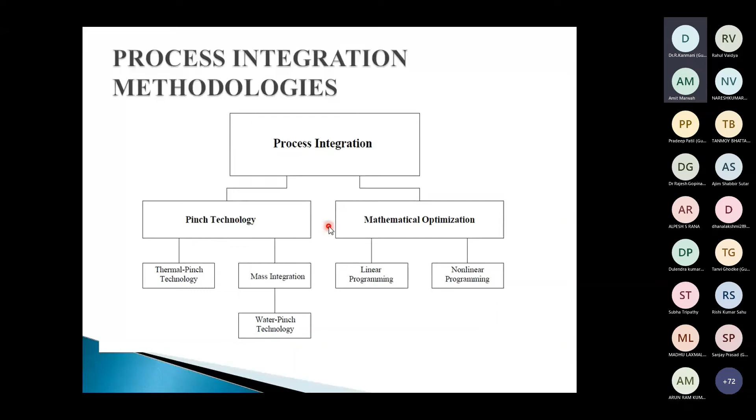I hope it is moving. Are we moving ahead with the slide? Yes, sir. Okay, yes, sir.

So there are two approaches. One approach is that you analyze the water network and try to reduce the cost of water. Reducing cost of water helps the industry in two ways: one, by paying less for the water, and two, by paying less for wastewater treatment, because if you use less, you generate less. So it's a double benefit if you can reduce water consumption. There are two approaches to this: graphical method and numerical method. The numerical method was suggested by Olesen and Polley, and the graphical design method I have taken from Robin Smith.

That is what I conveyed when discussing this. And this is the slide which I wanted you to look at, which is self-explanatory for pollution prevention. Have a look at it. I'll give some seconds to look at this slide.

So we can substitute toxic chemicals, we can reduce source consumption, we can initiate recycling, we can reuse, or we can reclaim from the waste. So there are various approaches to preventing pollution. Some of them are before the pipe, some of them are end of the pipe.

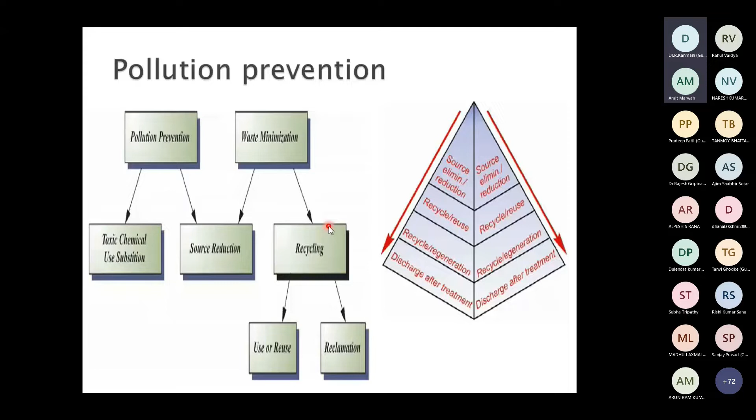This slide discusses something I mentioned before. You have a raw water treatment plant, so you take the raw water and treat it first, then send it to various processes. These are all process units which will consume water. In turn, the water gets polluted, and the outlet of all this combinedly goes to the wastewater plant to be treated.

Other portion of this water goes to the utility area, where you have a cooling tower and a boiler. So all this gets used, and becomes less polluted, but still not as raw as it was here. So you have another stream of wastewater. You mix these two, so you have less polluted water to treat. Ultimately the amount is more, but the pollution amount will be reduced because you are mixing a good source of waste and a worse source of waste.

There are other uses as well for the water. We use water in industry for many other things apart from process and utility. That use also generates wastewater. Combinedly, you send it to the wastewater treatment plant and treat it. As I told you, if you consume less here, you generate less here, so you are saving here plus here.

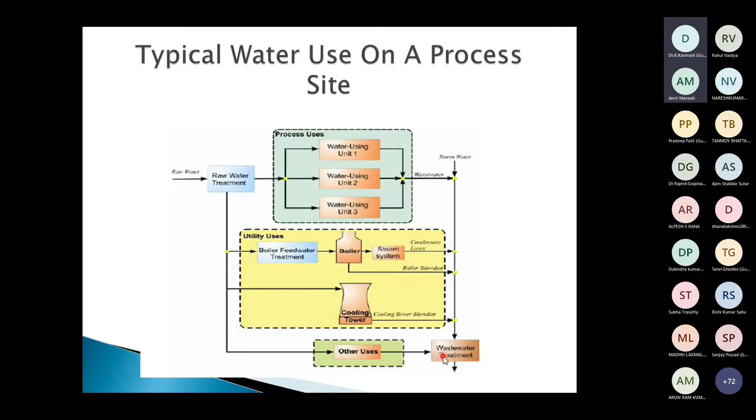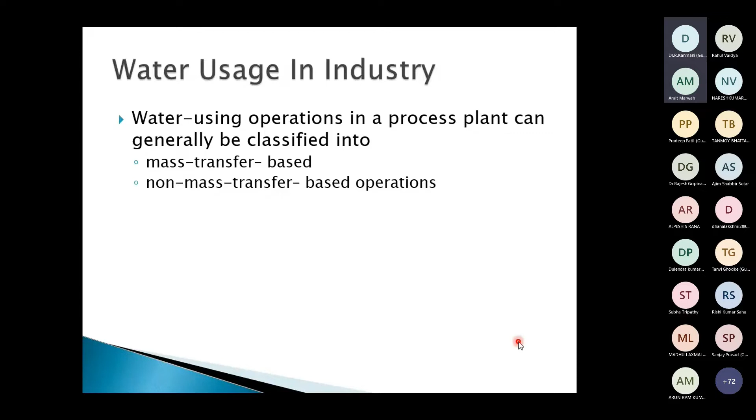We can classify our water using operations in industry into two basic main classifications: one which is mass transfer based, and other which is non-mass transfer based.

When you have a source which keeps adding some kind of pollutant to water, this happens. This line is nothing but the concentration of a particular contaminant in water. So this is your concentration in ppm, and this is the mass addition.

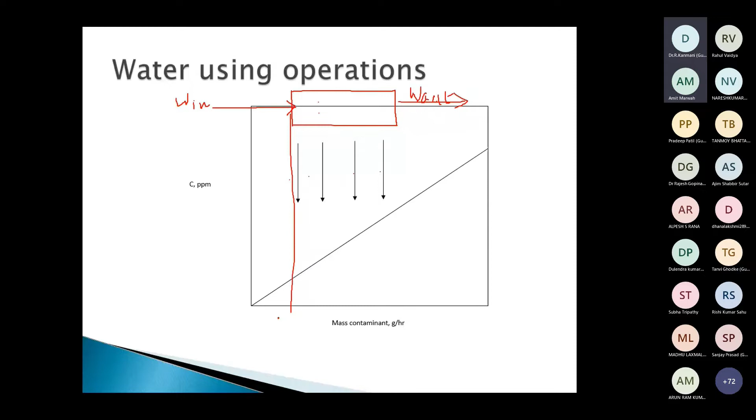So as water passes, say for example I have a process where water goes in and water comes out. During this process, some amount of contaminant is added. So this is the contamination addition to the water, and as it comes out, the concentration of contaminant is more. So naturally, this is in and this is out. Some mass is added, and because of that addition of mass in the water, the concentration level has gone from this to this.

So this is the concentration which has increased, this is delta C, and this is delta M or M. So mass added to the water makes the concentration gradient to the water. Correct?

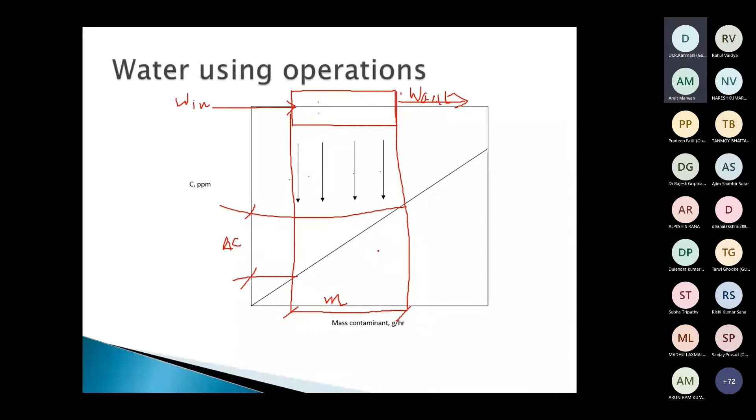So these are various water using operations in a process plant. On the left hand side of the screen, we have mass transfer based operations, and on the right hand side, we have non-mass transfer based operations. These are various operations which will absorb the contaminants from various sources, because of which water gets converted into wastewater.

So vessel washing, absorption, or reactor process. In reactor process, the water is coming out of the reactor. In vessel washing, the wastewater is generated due to washing of the vessel, while it washes the vessel it absorbs or receives contamination from the vessel. During the absorption process, if you are using water as a solvent, you are absorbing the pollutant from the gas, thereby generating wastewater. Likewise, there are various processes. I've just given a few representative examples here, however there are so many processes in industry which will add contaminants to the water.

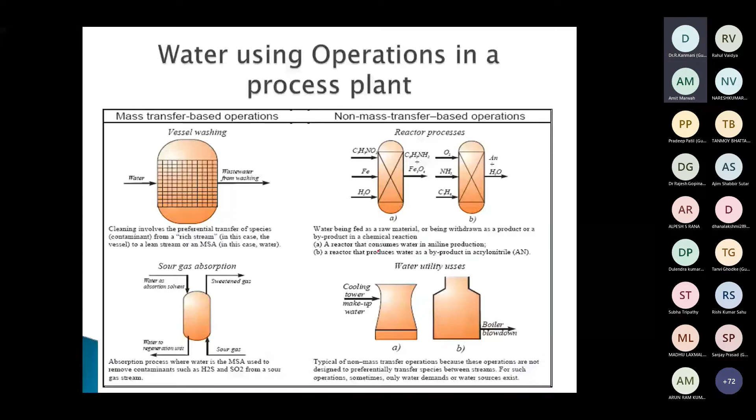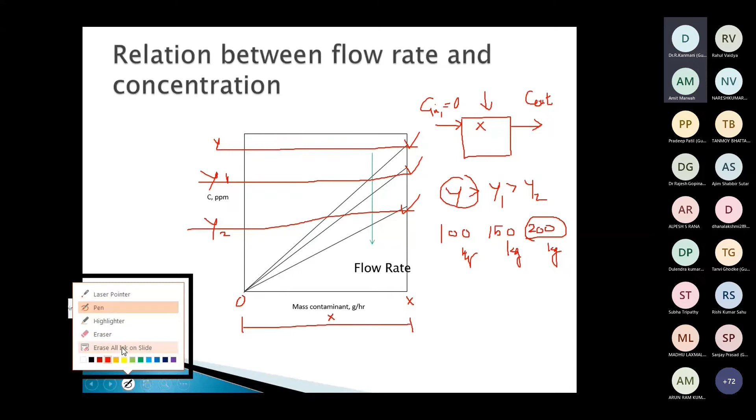Just a minute. Does it mean that I can draw any line? Can I do this? And eventually I can draw a line like this. Can I draw this vertical line?

Can anyone explain or tell me what is the physical significance as I move away from this to this? Flow rate is going to decrease, sir. Yeah, that is correct. But what does it mean? If I make a vertical line, what does it mean? The concentration level is going to increase... decrease.

With the decrease in flow rate, the concentration increases. But as you move from here to here, practically what are we doing? Practically, we are saying that there is no water which is passing through the operation, which is practically not possible. Is it possible? No, sir. Practically, it is not possible at all. We have to use some minimum amount of water. Yes or no? Every operation requires some minimum flow.

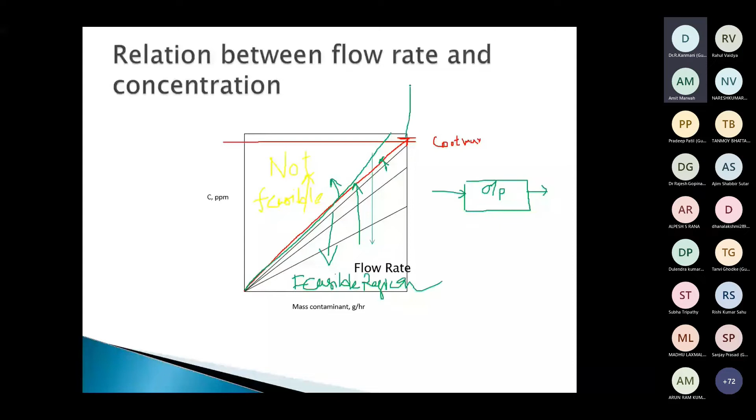Now let us look at the other way. My equipment can accept even much lesser flow rate, but as the flow rate decreases, the outlet concentration increases. If there is a limitation on outlet concentration, why is outlet concentration limited?

One, as I told you, solubility is one of the reasons. Two, maybe the outlet concentration is, because this is one of the operations, the outlet of this is going to either a wastewater treatment plant or another process. Now your wastewater treatment is designed in such a way that it cannot accept anything beyond a specific concentration. So that will limit your outlet concentration, and that will in turn limit your flow rate, and that will in turn convert this diagram into two zones, feasible and non-feasible.

Is it clear? Yes, sir. Thank you, sir.

So there are two possibilities. C out max may limit the flow rate, or the equipment water flow rate itself, requirement of equipment flow rate also can be one of the reasons. And C out max can be dictated by solubility, downstream processing, wastewater treatment. Maybe some concentration can lead to corrosion. Maybe some concentration can lead to accident.

So everything can contribute to C out max. But the basic reasons why the flow rate cannot go below a certain limit are two. One, minimum required flow rate. Two, maximum possible outlet concentration. Is it clear to all of you? Let me know if still you require to be discussed.

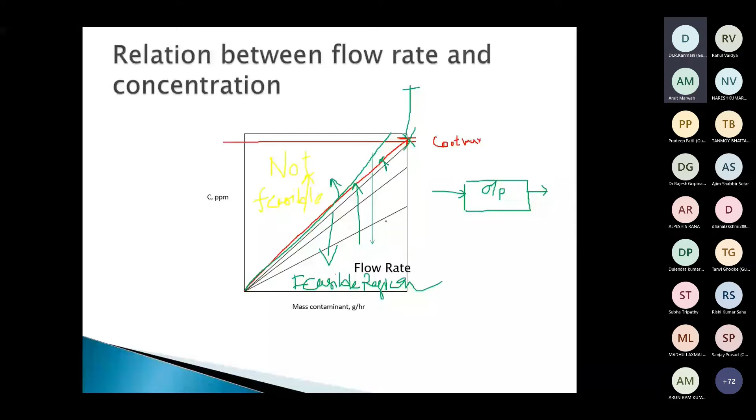Should I? Yes, sir. Okay. Yes, sir, please. Thank you.

So this we already discussed. As the flow rate decreases, the concentration increases. So minimum water flow, I already discussed this - operational requirements or maximum outlet concentration. I hope this is clear to everyone, so that's why I have skipped that slide. Right? Operating requirements or maximum outlet concentration, that is C out max.

Now what is limiting water profile? See, limiting water profile is for a given operation. There are two operations, let's say operation 1 and operation 2. Now operation 1 needs fresh water to be supplied as an inlet. That is the requirement of this operation, right?

And its C out max is C out M1. Whereas operation 2 can accept some contaminated water, say for example 50 ppm. This is C in. And C out is C out M2. Let us try to understand it here on this graph.

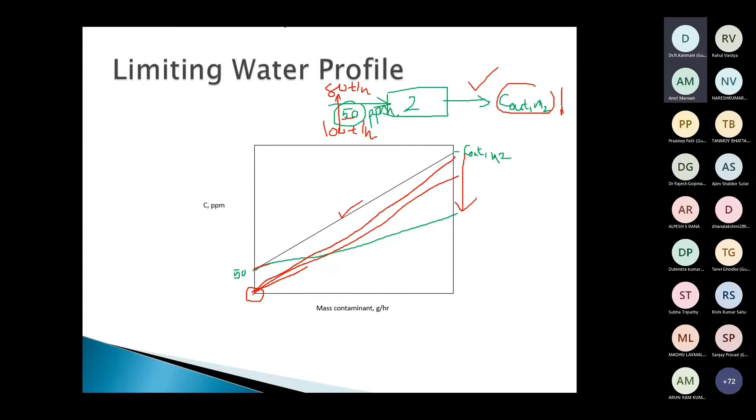So this is known as limiting water profile. It is when we supply a particular operation with its initial maximum inlet concentration and maximum outlet concentration and corresponding flow. It is termed as limiting water profile. Clear to everybody? Should we proceed further now?

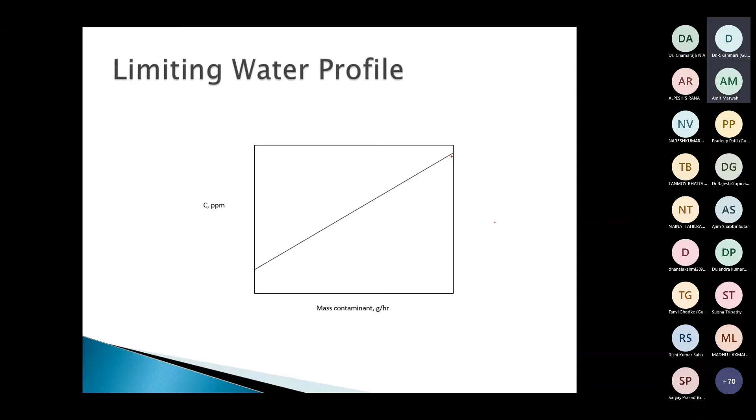Okay, great. Now, if we go to industry, we will not only be talking about single contaminant, we'll be talking about multi-contaminant. So there are two distinct classifications: single contaminant and multiple contaminant. Single contaminant - we talk of some chemical species like phenol, acetone, acetic acid, starch, or any specific chemical we are following in wastewater. We can even say an aggregate property like BOD, COD, suspended solids, total suspended solids - any one of them, mind well, not all.

Only BOD is single contaminant, only COD is single contaminant, only TSS is single contaminant, only phenol is single contaminant. So we follow either a species or an aggregate property, and that becomes part of your C - concentration of phenol, acetone, starch, or BOD in ppm, COD in ppm. This becomes the benchmark for your particular water network. Or we have multiple contaminants, a combination - phenol and acetone both, BOD and COD both, or maybe phenol, acetone, starch all, or all the properties with which we characterize our wastewater. Naturally, the mathematics associated with single contaminant is much easier to understand compared to multiple contaminants.

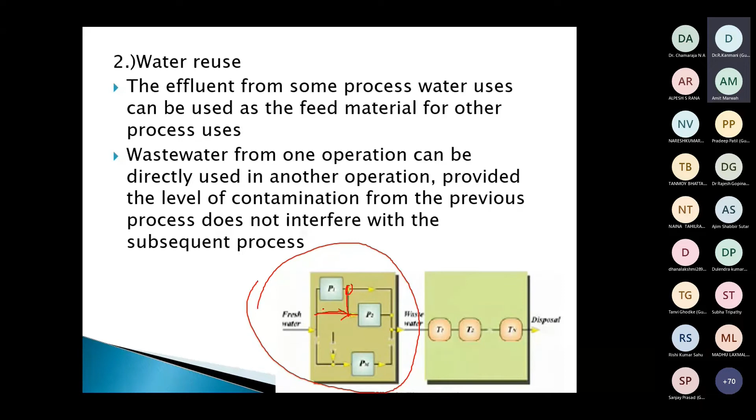Honestly, can anyone tell me if anyone has gone through all this, anywhere in any course, anywhere you might have been taught this somewhere? No, sir. No? Please provide your input, anybody, because the group is huge, I suppose. So if it is not done, I'll be happy that I could add something, because this is just a basic topic.

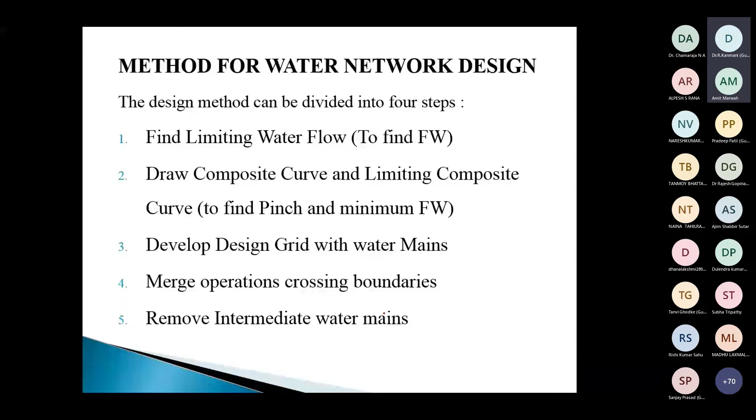There is no research involved in this, but I categorically chose this topic, as I told you in the beginning, because it can help you in so many ways, maybe as part of your seminar, maybe as part of a course you are teaching. So this is the general steps, and as we proceed further I'll explain one by one, with the help of an example. So let us try to understand this example first, and then we'll move further.

So there are 4 operations in a plant, and every operation has its own mass addition rate. Operation 1 adds 2000 grams per hour of contaminant in water. Operation 2 adds 5000 grams per hour of contaminant in water. Operation 3 adds 30,000 grams per hour of contaminant in water. And operation 4 adds 4000 grams per hour of contaminant.

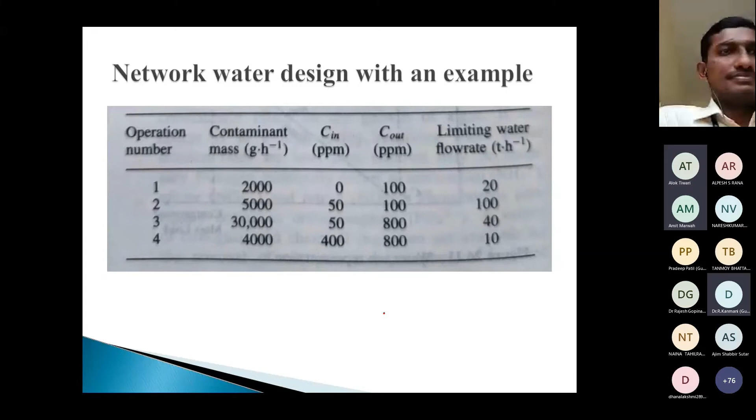Though in the beginning we classified operations as mass transfer based and non-mass transfer based, here we are not going to discuss whether the operation is mass transfer based or not, as long as it is adding the same single contaminant. I'll go back to this slide. So either that contaminant is phenol or any such property.

Another aspect: operation 1, you see, this is C in max, and this is C out max. So operation 1 always requires fresh water as supply. You can see that C in max is 0, meaning operation 1 requires fresh water. And the maximum outlet concentration for operation 1 is 100 ppm. So this is how we read it.

Operation 2 can accept anything up to 50 ppm. When I write C in max, it means up to that value. It can also be supplied with 25 ppm, or 0 ppm, or 45 ppm, but it cannot be supplied with 55 ppm. So this is the maximum possible inlet. Whenever there is anything other than 0, you can use 0 up to that value. Any value in between, you can use to supply that particular operation. Is it clear to everyone?

And in the same way, when I say outlet concentration maximum 100, what does that mean? You can end at any value less than 100, either by supplying fresh water or water which has lesser contaminant than 50, or by increasing the flow rate of the water. Correct? Both of these can decrease the concentration of outlet.

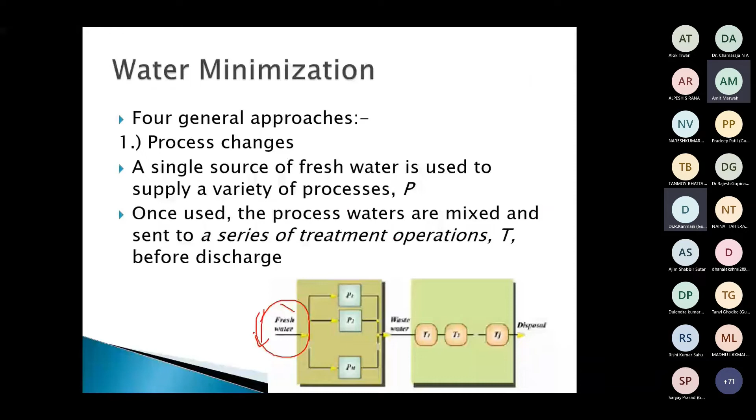Okay, now let us say we are not going to reuse anything. We are just going to go with the minimum fresh water flow for every operation. So we are not going to reuse anything. We are going to follow the first approach. What is that first approach? So if I want to minimize the consumption of fresh water, what I need to do is this.

Are you able to understand this? Yes sir, clear. Yeah, first is 20 because it is 2000 upon 100. fourth is 5. This 2000, 5000, 30,000 and 4,000 are nothing but the contaminants which are added, and we are supplying fresh water to every operation individually, and this is the least possible flow, right? So what I get is 112.5 tons per hour of fresh water required if I don't use any outlet as an inlet to any other operation.

All right, but I require minimum 112.5 tons per hour. Any changes here will increase the flow rate of water. So this is my first approach, that I'll use 112.5. Anything which I am using beyond 112.5, I have a scope of improvement. Correct? Clear to everyone?

Now let us try to go to reuse. And for reuse, the first thing is to draw composite curve. Are you able to understand what are these 4 arrows? Just try. Yes sir, the flow rate from 0, next starting 50.

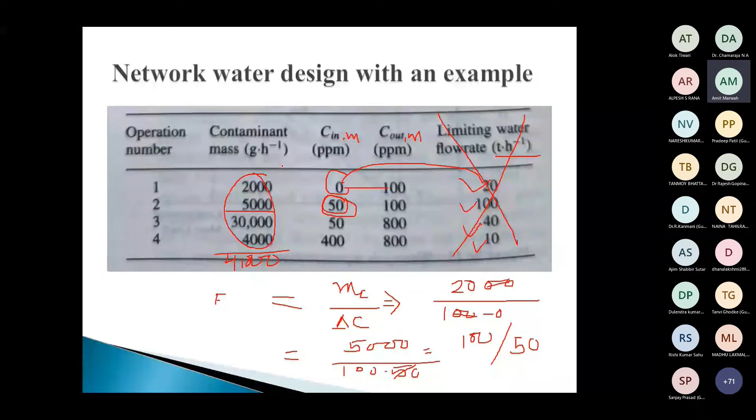So I have fresh water at 0 ppm, and I'm adding 41,000 in fresh water, and I have some wastewater generated. Now I'll be able to find out the composition or concentration of wastewater once I decide the flow rate of the fresh water, correct? So I'll try to do that.

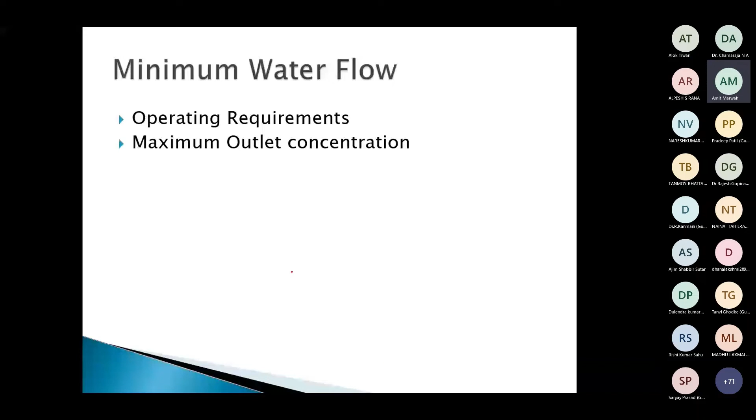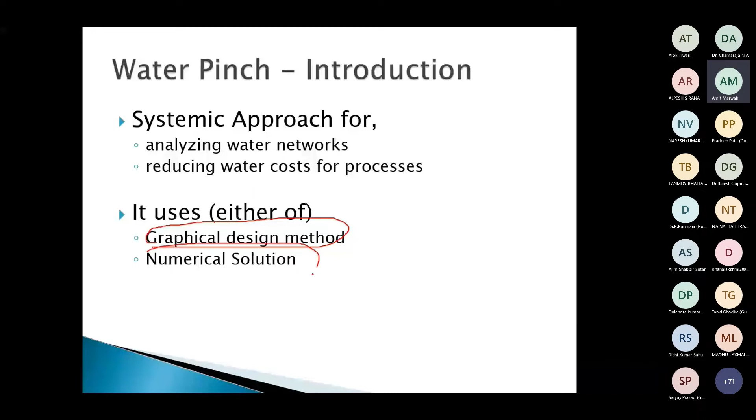So in order to do that, I am trying to put them on the same scale, on the same graph. So this is the graphical approach. If you remember, in the beginning I said there are 2 approaches: graphical approach and numerical solution. So we are discussing the graphical approach, and that graphical approach will give you the concept.

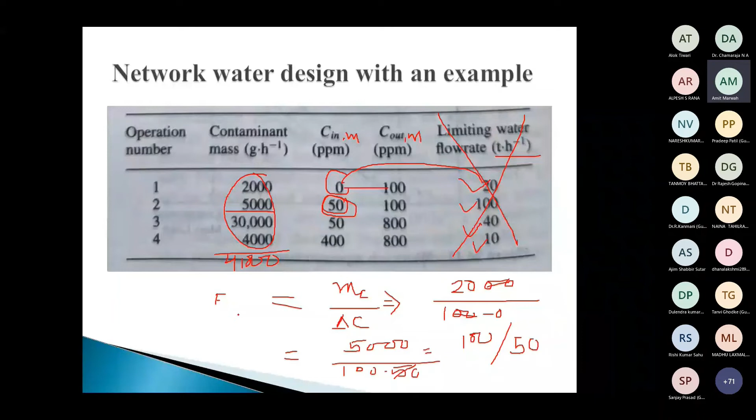It will give you the concept, and then based on that, some mathematics which is very easy to understand is developed. I'll be taking the same example to explain the graphical and mathematical approach so that you will be able to appreciate the difference. So please take this graphical approach for understanding the concept, and we will implement that using the mathematical approach by using the same concept.

So what we do is, operation 1 runs from 0 to 100, right? Operation 2 runs from 50 to 100. Operation 3 runs from 50 to 800, and operation 4 runs from 400 to 800.

Now what we will do is convert this into various concentration intervals. If you have studied pinch technology, or taught it, if you remember, comparing mass integration with heat integration, there the gradient is heat, that is temperature. Here the gradient is mass, that is composition. In pinch technology, we convert the problem into temperature intervals. Here we convert the problem into concentration intervals.

Have you studied process integration, heat exchanger networking, pinch technology? Anybody? Yes sir, yes, yeah. Okay, then I hope most of you will be having a chemical engineering background, and if so, you'll be able to appreciate it in a better way.

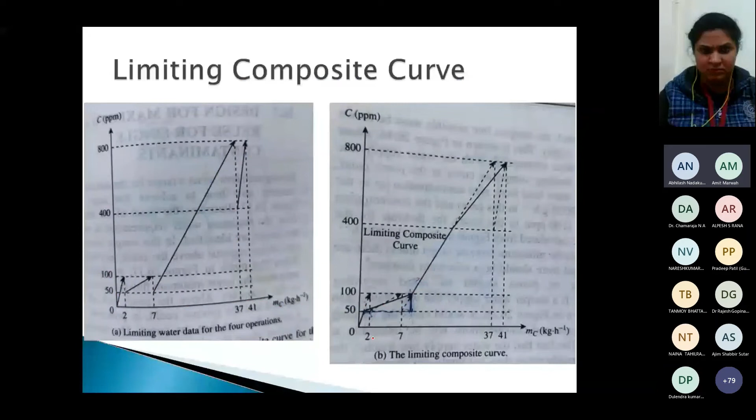So when you actually draw this on a graph, you will realize it will touch at 9 kg per hour, or 9,000 grams per hour, and the corresponding concentration would be 100. Hence when you get the flow rate of this line, it becomes nothing but 90 tons per hour. Just compare it with this value.

So if you supply fresh water to all four operations, you require 112.5 tons per hour. If you reuse the water, the target for fresh water reduces to 90 tons per hour. Correct? Do you understand this conceptually?

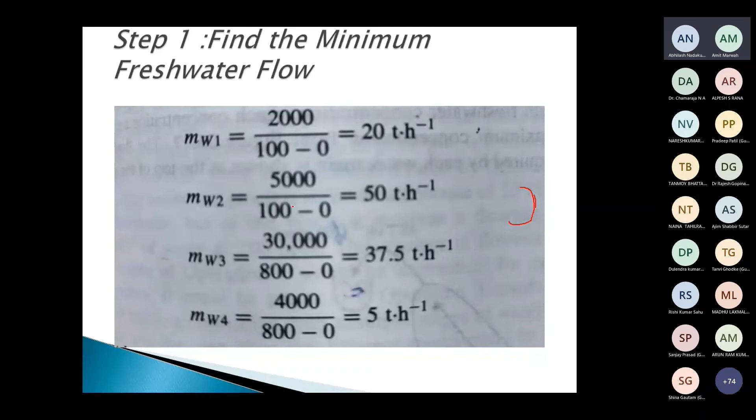You need to plot it on a piece of graph paper to get the actual values. How do you plot it? By using the numerical values which were supplied to you as part of the problem statement. So this is the graphical approach of determining the pinch point and minimum water flow.

Below pinch, 90 tons per hour is proper. But above pinch, you have another scope of reducing the flow rate. Are you able to appreciate this? I can take the concentration level up, right?

Any doubt in this? Anybody? 90 tons per hour and 100 ppm. Conceptually, if it is clear, we can proceed further, because I'll explain how to do this numerically. In the next two slides, I'll show you how to get the value of 90 numerically. It is by generating a table similar to the problem table algorithm of pinch technology. Let us see that.

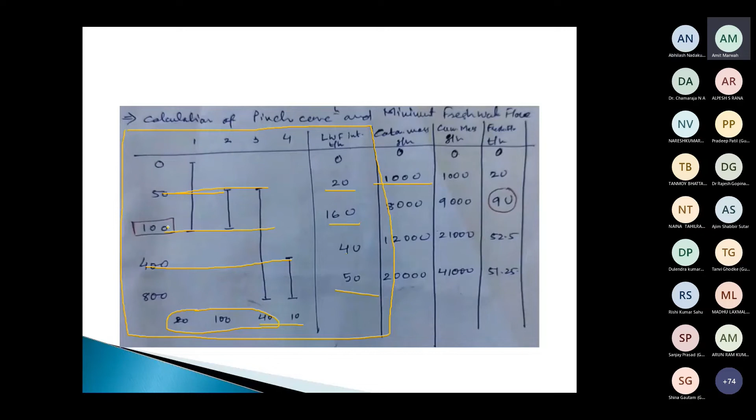And the delta C, the equation is this only. This is the basic equation. So if I want to find out mass contaminant, I have to multiply flow rate with delta C.

So what is my flow rate? 160. What is delta C? 50. So the corresponding mass added is 8000. For this interval, 40 into 300 making it 12,000. For this interval, 50 into 400 making it 20,000.

So is this clear to everybody? Yes sir. Correct? Okay, so this is for every individual interval.

What I want is the cumulative addition on the line, on the graph line. 0, 1... see, you can just see this. These are all corresponding to the same. Now I think you'll be able to appreciate: 1, 8, 12, 20. Are you able to appreciate this?

Up to 50, 1000. Between 50 and 100, 8, so making it total to 9. Between 100 and 400, 12 kg per hour, making total to 21. Between 400 and 800, 20,000 or 20 kg per hour, making this from 21 to 41.

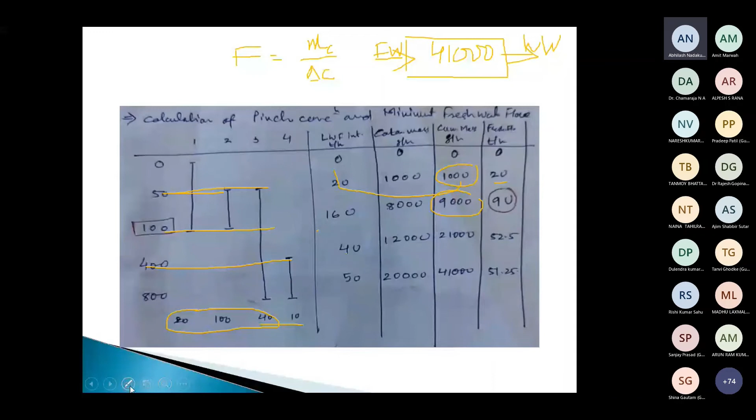And out of this, how do I decide which is my pinch point? Like in this case, we know the answer. Do we know the answer for this? We know the answer, 90 and 100, right? But how do I justify that? How do I explain it to you?

Here I know 90, but out of this column, this is minimum fresh water flow for a corresponding interval. You have to select the maximum value out of this, which makes the minimum fresh water flow.

All other values - 52, or 20, or 51.25 - if I supply them, corresponding to that 90, it will always be in the infeasible region. Are you able to appreciate that? So if I supply 20, only till this point it is feasible region, everything else is infeasible. If I supply 52.5, intermediately it will be infeasible region. If I supply 51.25, intermediately it will be infeasible region. But if I supply 90, throughout the curve it will be in the feasible region. Only this point is the one where it pinches, right?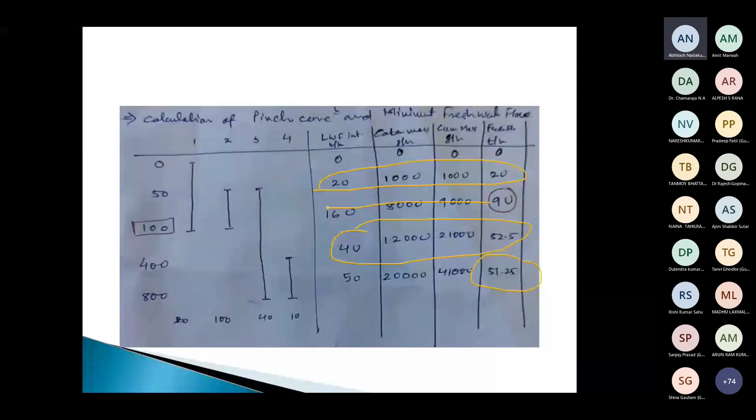So how do I get that from the table? From the table, correspondingly, the pinch concentration is 100 and the mass which is going to be added till pinch point is 9,000. So is this tabular approach clear to everyone? Given a problem, you should be able to convert it into this form and should be able to find the pinch point and corresponding concentration.

Clear to everyone? Any doubt in this? Participants can ask if any doubt is there. Okay. I hope I have not made you sleep by discussing all this. No sir, it's clear, it's clear. Okay.

Thank you. So the next point is, how do we find out? See, above the pinch, the flow rate is 90, that is this. Above the pinch, it is 90. If I continue with 90, I'll generate 90 tons per hour of wastewater with this concentration. Whereas for this particular process, you can generate up to 800 ppm.

So how do I do that? For getting the flow rate below pinch, what I do is: till pinch point, out of 41,000, 9,000 grams per hour mass is already added to the water. So the remaining mass which is going to be added after pinch is 32,000 for this particular problem. And what is the delta C after pinch? Till pinch point, the concentration is 100 ppm, and after that it will be 800 minus 100, making it 700. And hence the flow rate is 32,000 upon 700, making it 45.71 tons per hour, which is nothing but this line. In this diagram, it is this line: 32,000 divided by 800 minus 100.

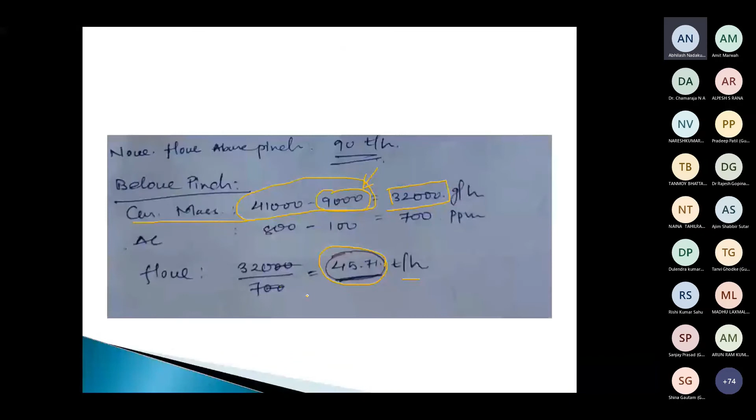So it's a limiting water flow. You can just see. So what happens to the remaining amount? You have 90 tons per hour of fresh water, and then 45.7 goes further. So from pinch, you remove 90 minus 45.7 and add it to wastewater. I'll show you what I am trying to say. So you convert the entire problem into two distinct zones. This is how we are going to design our entire network: two zones, up to pinch (above pinch), and then after pinch (below pinch).

So we have 3 water mains. First, fresh water, I need 90 tons per hour. Then I have 100 ppm, 90 tons per hour, out of which 45.7 will go further and this will go to wastewater. And 45.7 will be passing through this and it will reach to 800 ppm, and this is my third water main. Clear to everybody? So this will be our design strategy. What we'll do is we'll take all the operations to 100 ppm first, and then from 100 ppm we'll take it to 800 ppm. Correct? Is the idea clear to everybody?

Then I can proceed further. Yes, yes sir. Reshma madam? Yes yes sir, will you get everyone tea? Sir, you can continue, it's up to 3:30. Yes, I was just saying, you can serve tea at your own homes, so that I can get some responses. Okay sir, sure sir, okay, let's go.

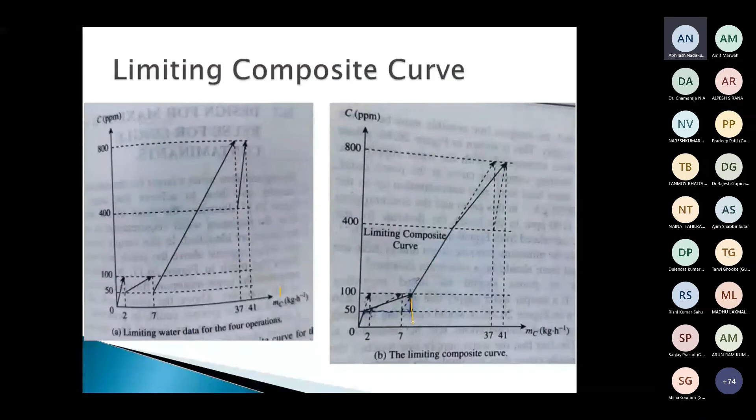9,000. Even the graphical approach says 9,000. So if I've already added 7, how much am I left with? Out of 9, 7 is already added. 2. How much am I left with is 2. Right? Operation 3 can accept

50 ppm water, right? But I have 20 tons per hour of fresh water with me. Do I have it? Because what I've used is 20 here, 50 here, so I'm still having 20 tons per hour of fresh water. So this is operation 3. I'm adding 2 kg per hour or 2000 grams per hour, and my flow rate is 20 tons per hour. What will be the outlet concentration? 100. In other words, I have 2 kg per hour or 2000 grams per hour of the contaminant. My maximum outlet concentration till the pinch point is 100, and hence I require 20 tons per hour of fresh water. This will always be a tightly placed material balance.

So above pinch, that is above this line, what I am going to do is supply 20 tons per hour of water to operation 1, 50 tons per hour of water to operation 2, and 20 tons per hour of water to operation 3, thereby taking operation 1 to 100 ppm, operation 2 to 100 ppm, and operation 3 to 100 ppm. Why is operation 4 not appearing here? Because operation 4 starts with 400 ppm, which is after the pinch.

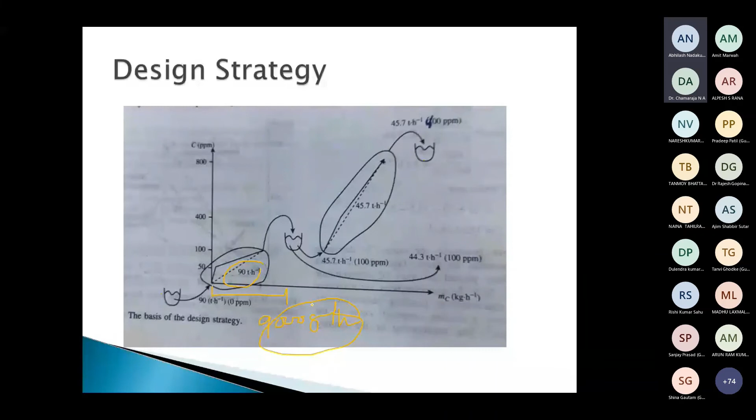Yes sir, this is clear. So that forms the base for our further design. Now this requires fresh water of 20 tons and 2 kg per hour of contaminant, correct? Okay, operation 2.

Operation 2 adds 5 kg per hour or 5000 grams per hour, and it requires 50 tons per hour of fresh water. So I've used 70 tons per hour of fresh water and 7000 grams per hour of contaminant. How much contaminant am I left with for this region? 2000 or 2 kg per hour, right? So that is something which I know.

Now again, my flow rate equals mass contaminant upon delta C. I have used 70 tons per hour of fresh water - 50 plus 20. So how much am I left with? 20. How much contaminant can I add? 2000. So what will be the delta C? If I take it there and take this here, my delta C would be 100.

This is 20, right? So delta C would be 100. That means I'll take operation 3 to 100. I'll write it here, in a proper way. Delta C is mass contaminant upon flow.

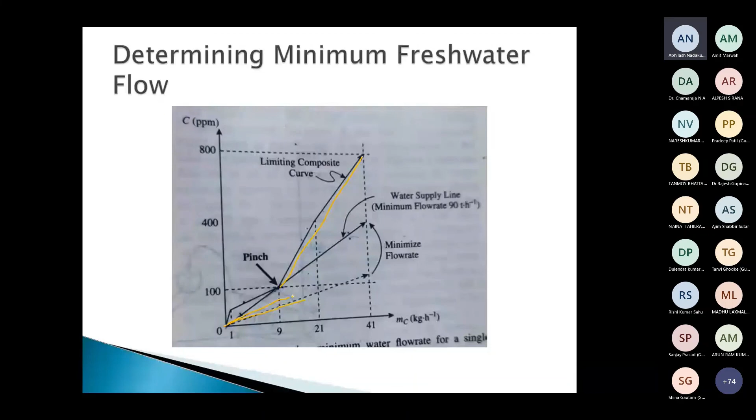The reason for that tight balance is this line - just look at this line. It is touching it here, right? If this would have been slightly different, in between this, you may have some kind of lesser concentration or more flow of fresh water, but we have tightly drawn the lines which just touch the point. Hence the material balance is completely tight.

So 20, 50, 20 - these two lines or operations are dealt with and have reached 100 ppm. How much water has come to 100 ppm? 20, 50 and 20. One more thing - if you're not able to understand this, the intermediate water main is actually an imaginary water main. So I am not going to actually make two parts of operation 3. I just cannot - operation 3 is a single operation.

But right now I am imagining, I am visualizing that operation 3 has two parts - one part on the left hand side of the water main at 100 ppm, the other on the right hand side of 100 ppm. So that pinch is an imaginary water main right now, because that can sometimes confuse people - how can I have two different parts of operation 3? There are no two different parts, it will be single. Right now we are looking at it from two different parts, and eventually we are going to make it one. So is this clearer than before? If yes, I can proceed further.

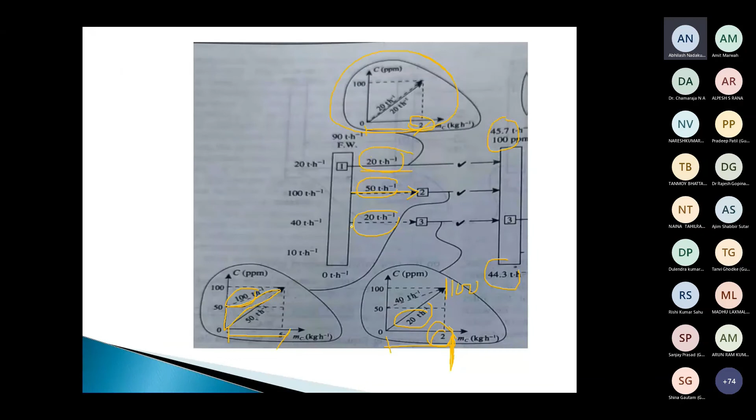And hence you have to take a call - either it will be 20 or it will be 40. Just tell me, this 20 tons per hour of water which I have added is with... what I feel is this will make you more attentive.

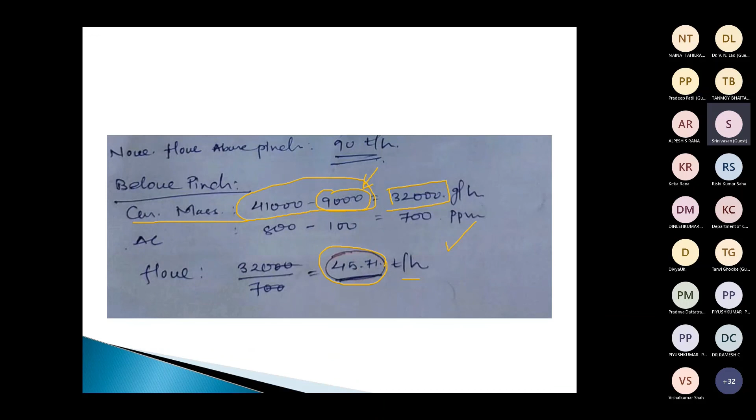Okay, coming back to this, I think what we discussed was this: there were 3 operations before the 100 ppm line - 20 tons per hour, 50 tons per hour, 20 tons per hour, right? And this 20 tons per hour will take operation 3 to 100 ppm, whereas operation 3 runs from 50 to 800, and it adds 30,000 grams per hour, right?

So when you add only 2,000, it reaches 100. Remaining 28,000 we are adding here, but while we add that, the flow rate goes to 40. So we also discussed that on one side it is 20, on other side it is 40 - that is not possible. So we have to make some way. How do we do that?

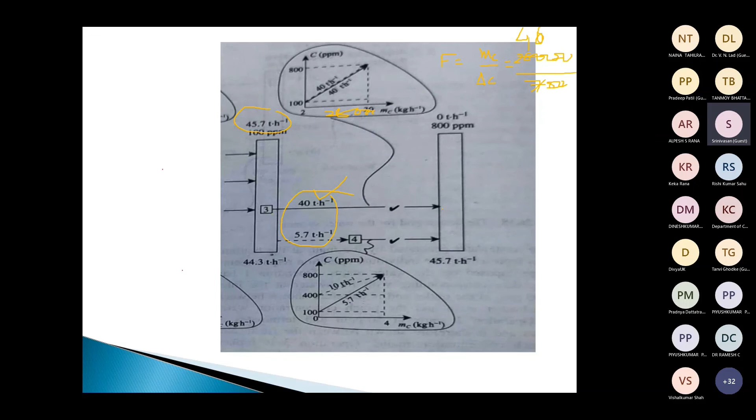This is the theory behind that. I'll skip this theory - you can refer to Smith's textbook for understanding this theory. But this is something which we did, and I think I was explaining this slide while I got a call from Reshma Madam that we are out of the meeting.

So what is happening? And I was like, why am I not getting the feedback? So what is happening? Just try to see this - what is happening here?

So first operation 20 tons per hour, second operation 50 tons per hour, third operation fresh water 20 tons per hour reaches to 100 ppm, and from this point onwards 40 tons per hour, and this is 5.7. So I have made the mass balance quite proper. Till 100 ppm, 90 tons, and after 100 ppm, 45.7 tons, right?

But we have not reused anything till now, right? If you look at this figure, you'll be able to understand what are we reusing. Just see, I'm taking 20 tons per hour of 100 ppm and I'm adding it to 20 tons per hour of fresh water or 0 ppm. So actually what is going inside operation 3?

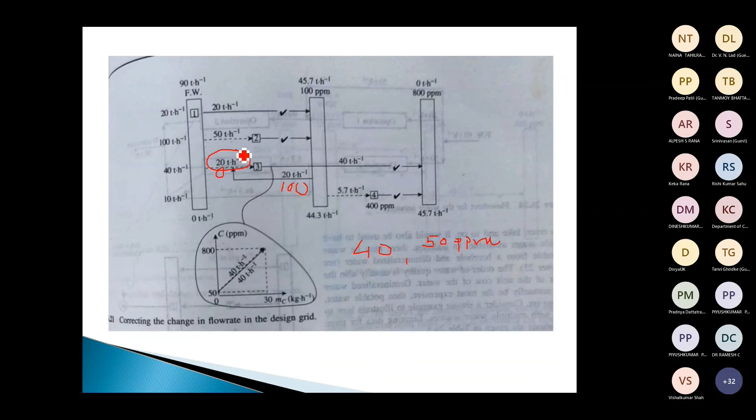Correct? 20 tons of fresh water, 100 ppm, I mix it, so this becomes 40. So the issue which we were discussing, that on one side it is 20, on the other side it is 40, is eliminated by taking 20 tons 100 ppm from the intermediate mains, adding it to 20 tons fresh water and giving it to operation 3.

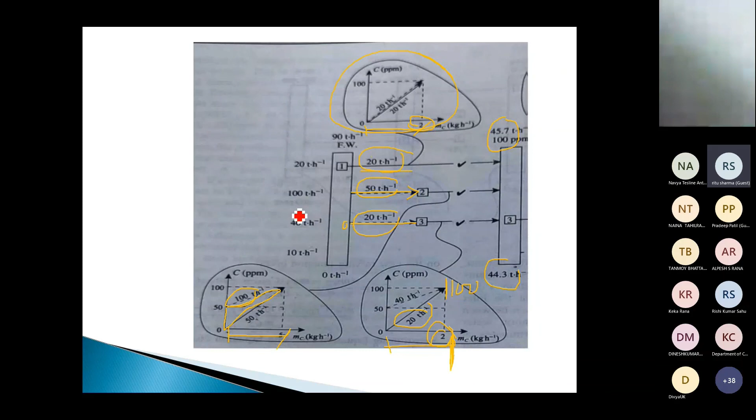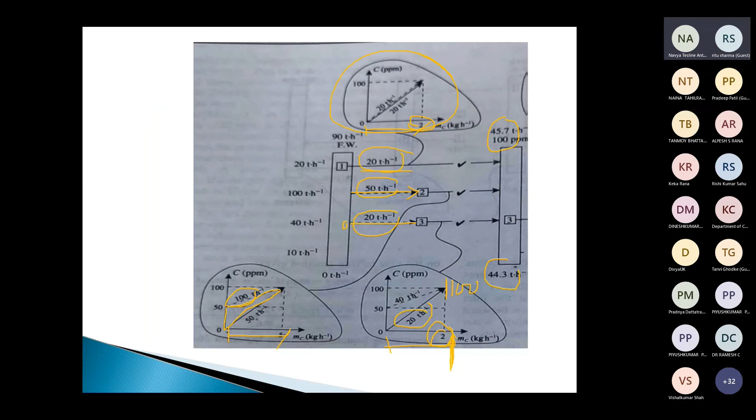So 40 tons per hour, 50 ppm. Anyway, operation 3 can always accept 50 ppm. So operation 1, operation 2, operation 3 and operation 4 all are covered, and whatever we've done is we have used 20 tons per hour 100 ppm and mixed it with 20 tons per hour of fresh water to make it 40 tons per hour, and we have supplied operation 3.

So what actually has happened, if I remove this intermediate grid, this is what has happened. Just see this. Are you able to understand what is happening here? Operation 1 is here, 20 tons, it generates 20 ton 100 ppm.

This is added to fresh water 20 tons per hour, making 40 tons per hour 50 ppm, going to operation 3, and 50 tons per hour, generating 50 tons per hour of 100 ppm, out of which 5.7 goes to this and remaining goes to wastewater.

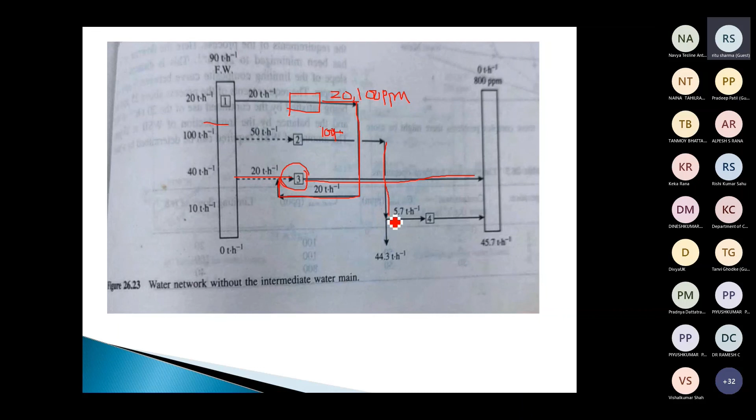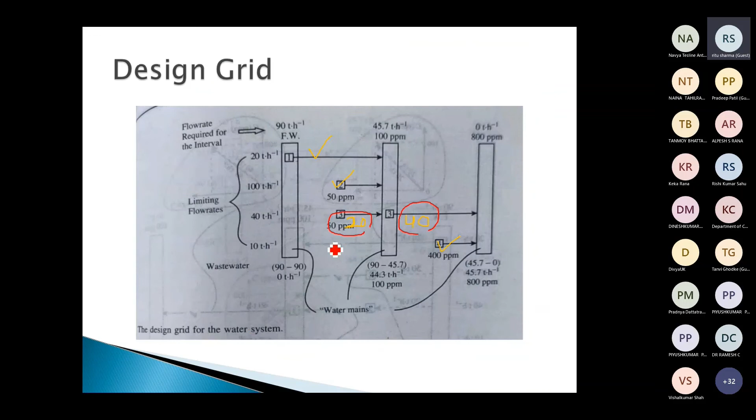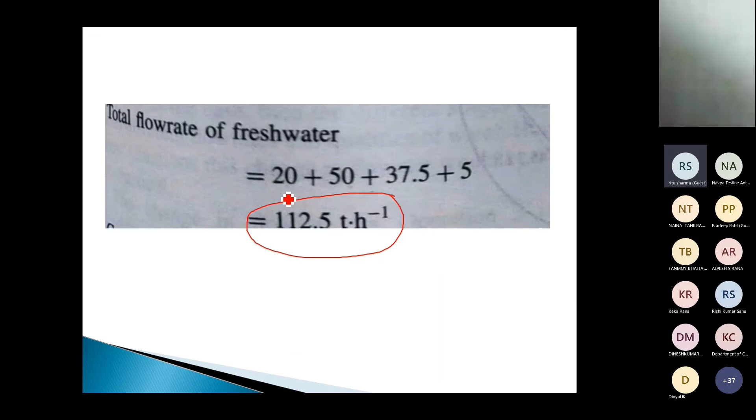I'll come back to this slide. I just would like you to take back to the initial slides where I was discussing about 4 different approaches. What were those 4 different approaches? Minimize the fresh water, second, reuse. So that reuse concept is what we have shown in the last slide.

Just see this. Have we done this? Operation 1, outlet mixed with fresh water, operation 3. Operation 2, outlet mix it with fresh water, operation 4. Right, precisely this is what we did, right?

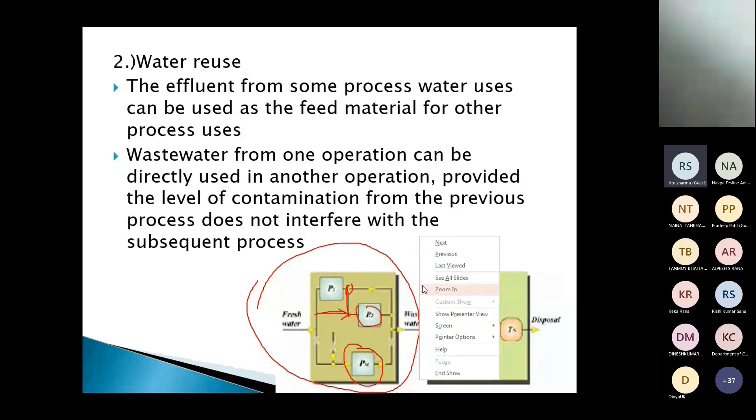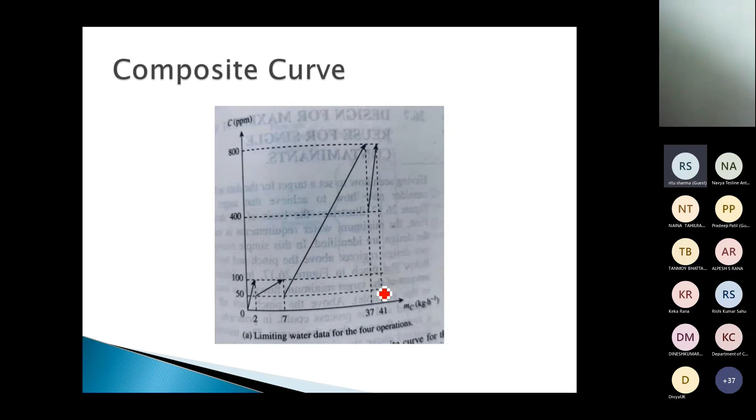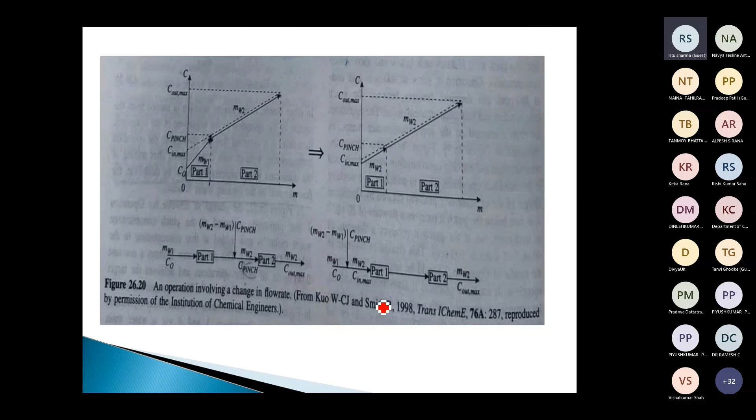To achieve the required minimum water flow rate, so we have used the concept of pinch in order to design a network here. And this is your network. Just see this. Correct? Right?

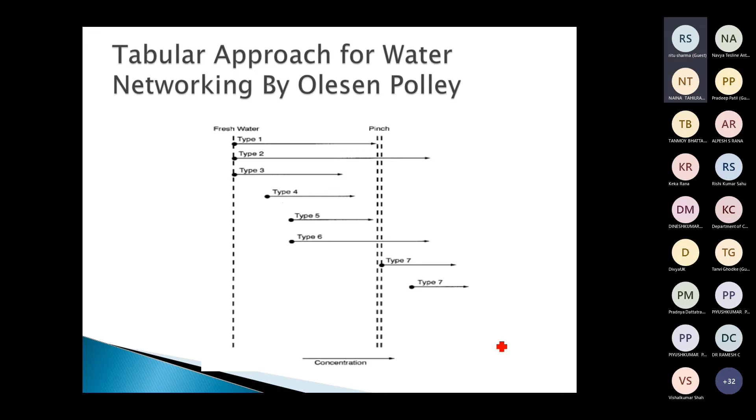Madam? Yes, sir. I've got a few slides. If you have got some time, I'll discuss them, else I'll share this PPT with you. Sir, actually the next speaker will join within 10 minutes. Fine, fair enough, and they have a tea break. Yes, so at 3:45 I think we can be there. So the best thing is I can share the paper, I can share the research paper also of this, so those who are interested can go through that.

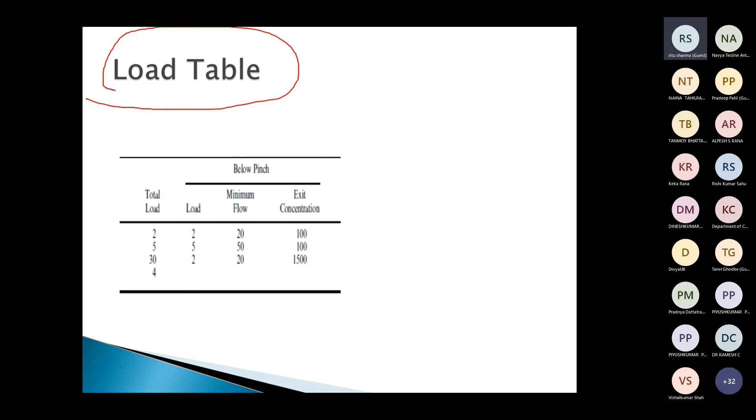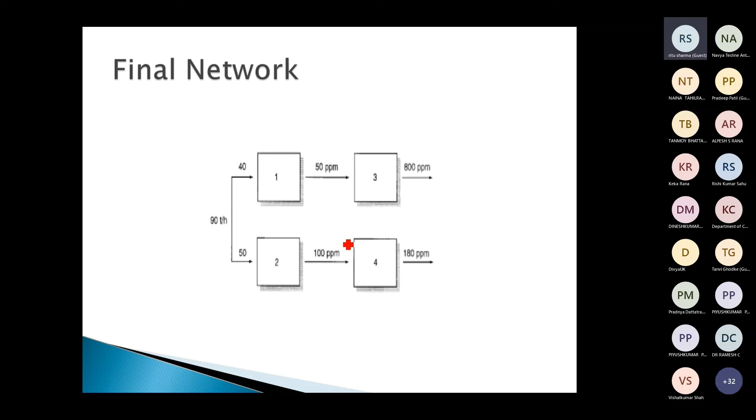I'll share with you, madam, this PPT and the paper. They can go through it — the entire thing is based on this load table, so you don't need to undergo all these discussions which we did here. We generate the load table, below pinch, above pinch, and we make the final network. So though it is 3-4 slides, the discussion may take longer, that is why I asked what is next. So we can stop here.

Right? Yes, yes, sir, visible. Yes, you can send it to me on this email. I'll try to help you out with the query. I'll surely send the PDF of this and the paper which I'm referring to for your further reading if you are interested in. So it is JOSHIPURA.